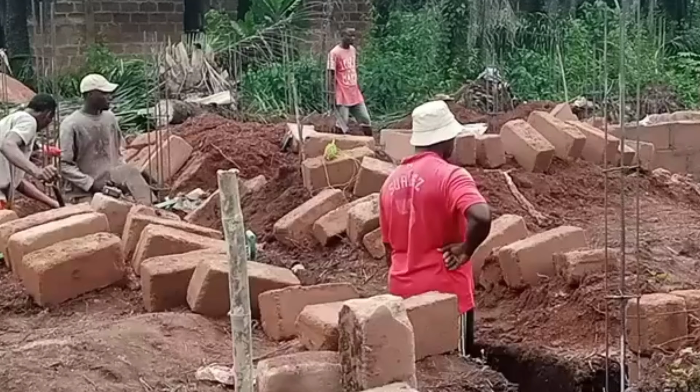Cost of building a 3-bedroom bungalow here in Nigeria. In this video, I'm going to give you the estimated quantity of materials needed and the estimated cost of materials using the current price, that is, the current price of building materials here in Nigeria in October 2024, excluding cost of labor. Yes, we are not including cost of labor in this video.

Now, I want you to note that it's going to be very difficult for you to derive an exact estimate for any building. So estimates can be high or low depending on the following factors. One, the location of the land, the location of the building. If you're building in Lagos, the cost of building a 3-bedroom bungalow in Lagos is different from the cost of building a 3-bedroom bungalow in Abuja. That is number one, the location of your building.

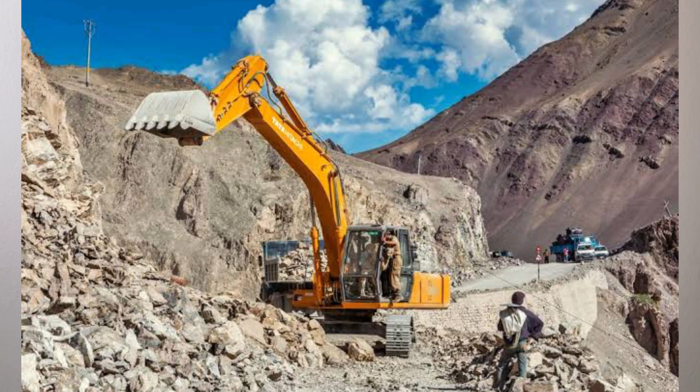The second one is the topography of the land. Are you building on a mountain area or valley or around bodies of water or on a plain land? If you're building around a mountain area, like the land is very mountainous in nature, it's going to cost you more to excavate this land. So even if someone is building the same 3-bedroom bungalow on a plain ground, it's going to cost you more because yours is a mountain area. It's going to cost you more to excavate the land.

Now, if you're building on a valley, it's going to cost you more for reinforcement. The filling of the land, from the foundation to the DPC level, and the reinforcement is going to cost you more, right? So that is it, the topography of the land.

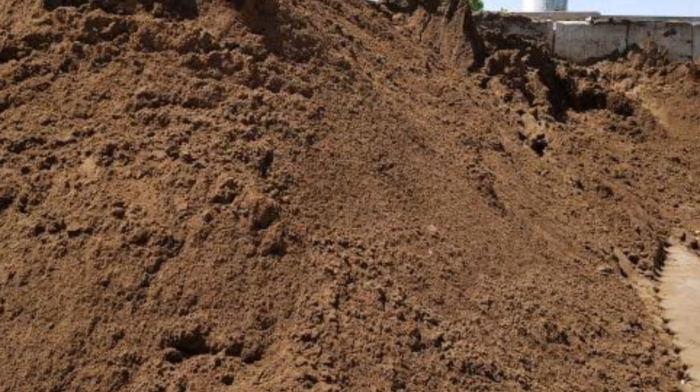Then another thing is the type of soil you're building on. Is it on a clay soil, loamy soil, sandy soil? We all know that loamy soil is the best type of soil for building. So the type of soil. Another thing is the design of your building. If Mr. A is building a 3-bedroom bungalow and you are building another 3-bedroom bungalow, if your design is not the same, the cost of building that 3-bedroom bungalow is not going to be the same.

Another thing is the construction method. The construction method this engineer used might be different from the construction method this other engineer used. So it's not going to cost the same. The different construction methods are going to require different amounts of money.

You understand? Another thing is the cost of building materials as at the time you're building. Even if someone built a 3-bedroom bungalow in 2023 with 10 million naira, it's not going to cost you the same 10 million naira to build that same type of 3-bedroom bungalow in 2024, and it's not going to cost you the same in 2025. So the cost of building materials as at the time you're building is another factor.

Another factor is the cost of labor. The cost of labor differs. Different engineers with different payments, the cost of labor differs. So these are the factors that affect the estimate or bill quotation any engineer will give you.

So the best way to get a very close estimate for your building is from your building plan. Once you get your building plan from your architect, you take it to your engineer. Your engineer should be able to derive a very close bill of quantities or quotation, the way we say it here in Nigeria, from your building plan.

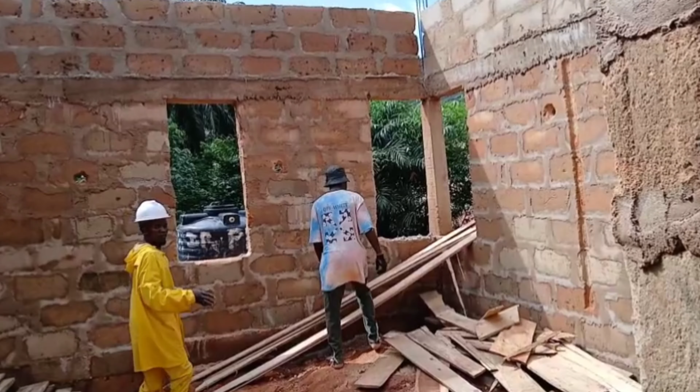For this particular 3-bedroom bungalow we are going to build, it has 3 bedrooms, all en-suites. It has a walkway. This bedroom has a walkway. There is an entrance to the whole apartment. That is the entrance, the outside. Then it has the kitchen, the visitors toilet. It has a balcony, the kitchen balcony. It has a sitting room. So these are the features the 3-bedroom bungalow has.

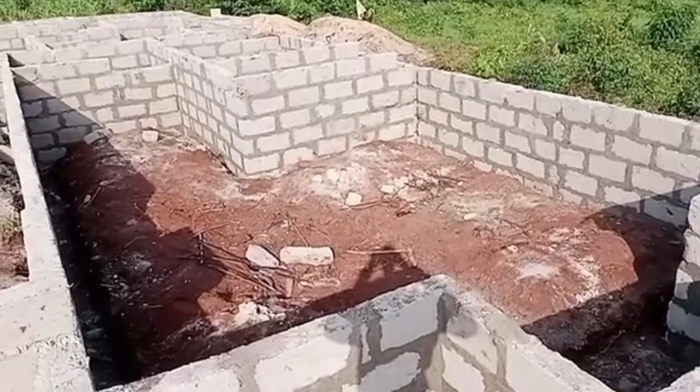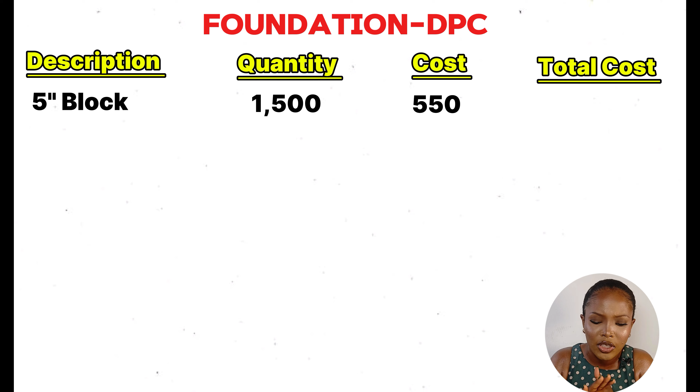For this particular 3-bedroom bungalow, from foundation to DPC level, we need 5 inches block, and we need 1,500 pieces of 5 inches block, and each 5 inches block costs 550 naira. So 550 naira times 1,500. Multiply 1,500 by 550 naira. We have 825,000 naira.

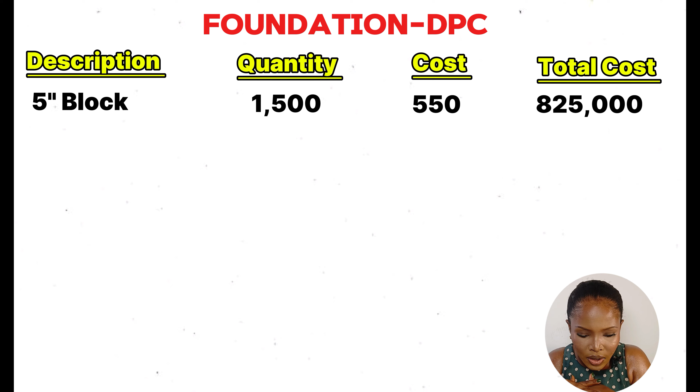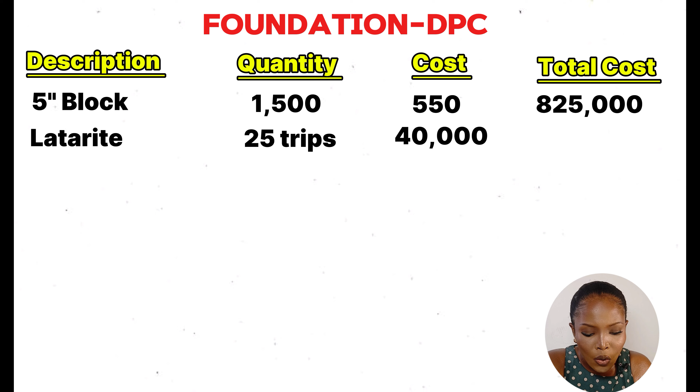Then the next one is the filling sand, that is the laterite. The filling sand, we need 25 trips, and each trip costs 40,000 naira. Currently, here in Delta State, in October 2024, the current price of filling sand, that is laterite, is 40,000 naira for a trip. That is one tipper, a trip. And now we need 25 trips, 25 tippers of laterite, and multiply that. 25 times 40 is giving us 1 million naira.

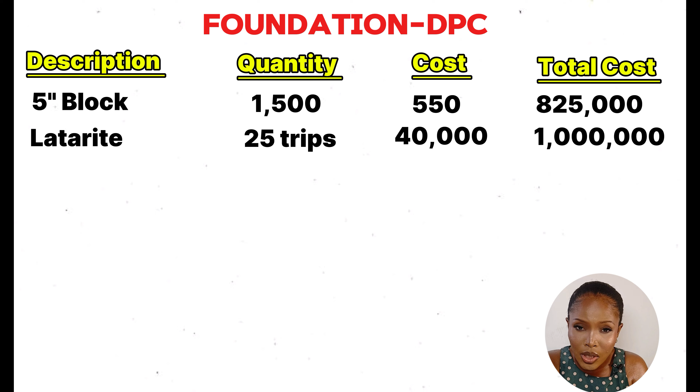Now, cement, we need 50 bags of cement. A bag of cement now in Delta State in October 2024 is 10,300 naira. It's always fluctuating. So 10,300 naira times 50 is giving us 515,000 naira.

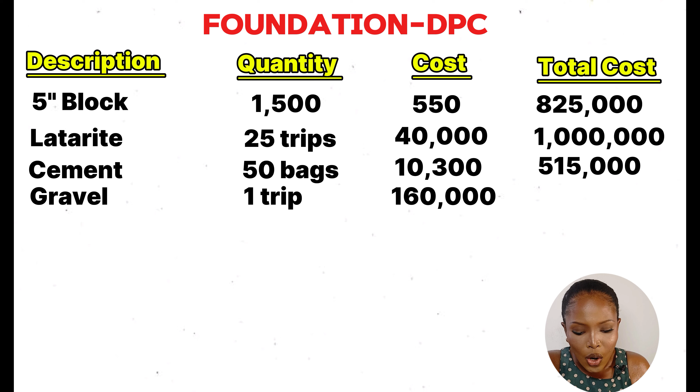Another thing we need is gravel. This is from foundation to DPC. We need one trip of gravel, and each trip of gravel is 160,000 naira now in Delta State, Nigeria. So now multiply 160 by 1 is giving us 160,000 naira.

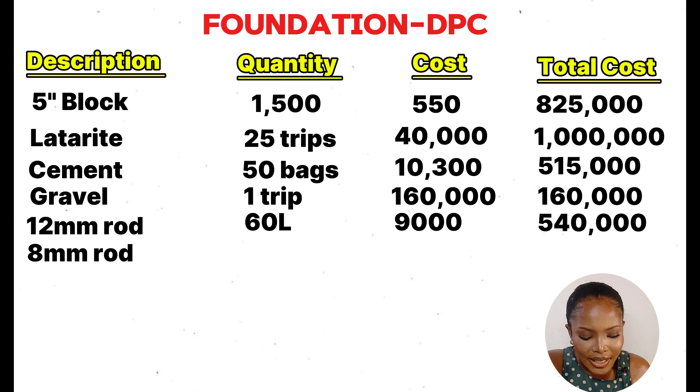Now we need 12 rod, and we need 60 lengths of 12 rod, and each length costs 9,000 naira. So 9,000 times 60 is giving us 540,000 naira. And then another thing is 8 rod. We need 20 lengths of 8 rod. Each length costs 4,000 naira. 4,000 times 20 is giving us 80,000 naira.

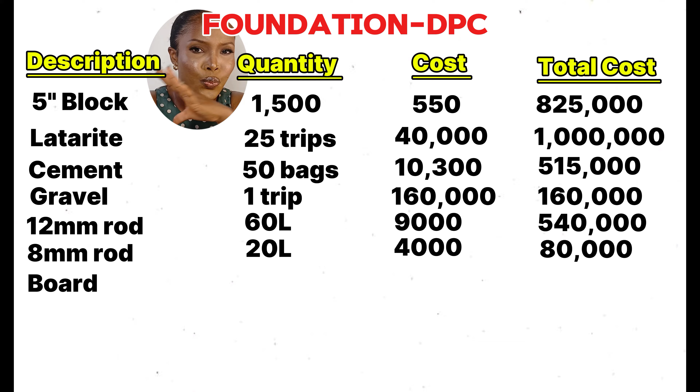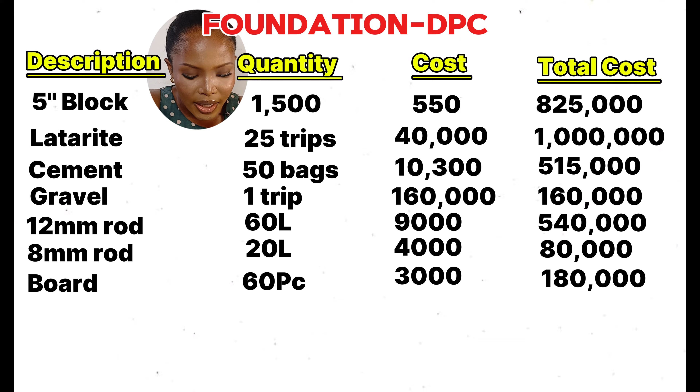Another thing we need is board. We need 60 pieces of board. Each piece of board costs 3,000 naira. So 3,000 naira times 60 is giving us 180,000 naira. We need binding wire for the whole reinforcement, and we need one roll of binding wire. One roll of binding wire costs 30,000 naira. So 30 multiplied by 1 is giving us 30.

Another thing we need is 3 inches nail. We need one bag of 3 inches nail, and each bag of 3 inches nail costs 33,000 naira, currently, in October 2024. So 33,000 times 1 is giving us 33,000. Another thing again is 4 inches nail.

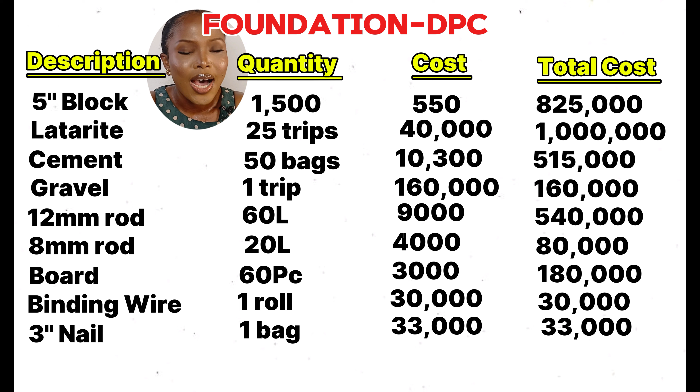We need another 4 inches nail, one bag of 4 inches nail. That one also costs 33,000 naira. 33 multiplied by 1 is giving us 33,000 naira.

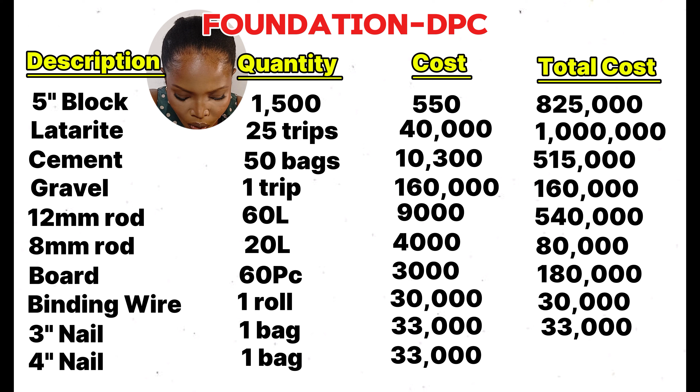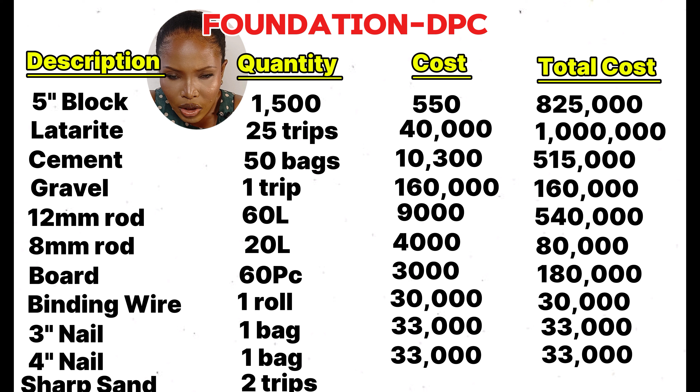We need sharp sand, to mix with the cement. The sharp sand, we need 2 trips. 2 trips of sharp sand, and each trip costs 60,000 naira. A trip of sharp sand now in October 2024 costs 60,000 naira. So 60 multiplied by 2 is giving us 120,000 naira.

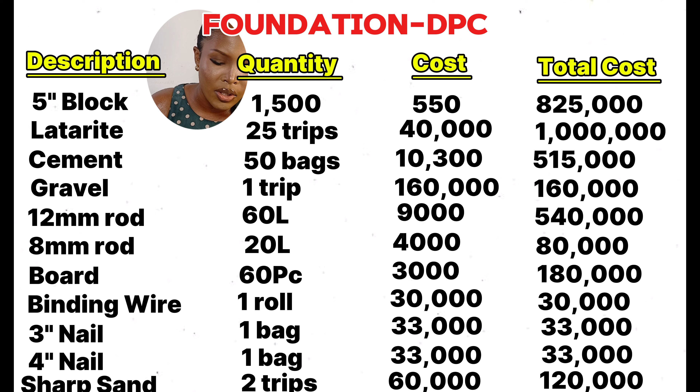120,000 naira. So from foundation to DPC, once you add everything together, is giving us 3,516,000 naira. 3,516,000 naira from foundation to DPC to build a 3-bedroom bungalow here in Nigeria in 2024.

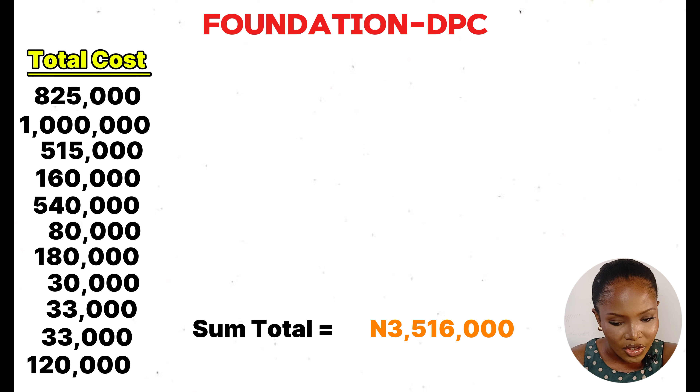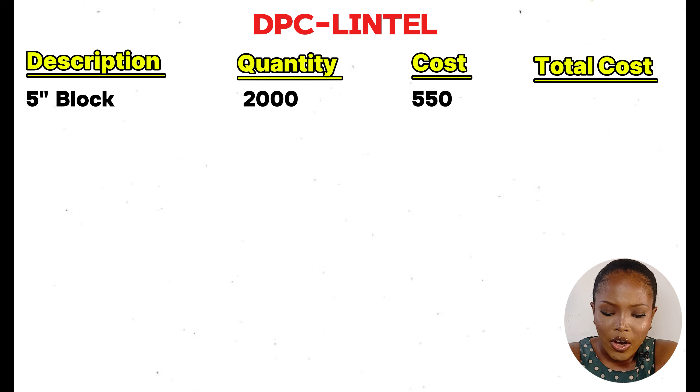Now, from DPC to Lintel level, we need 5 inches block. We need 2,000 pieces of 5 inches block, and each, of course, is 550 naira. 550 times 2,000 is giving us 1,100,000 naira. That is 1.1 million naira.

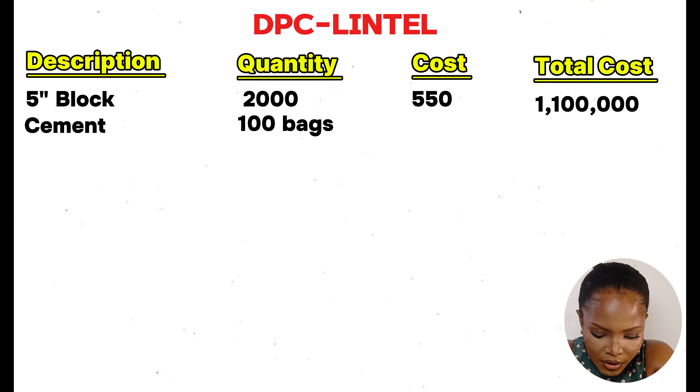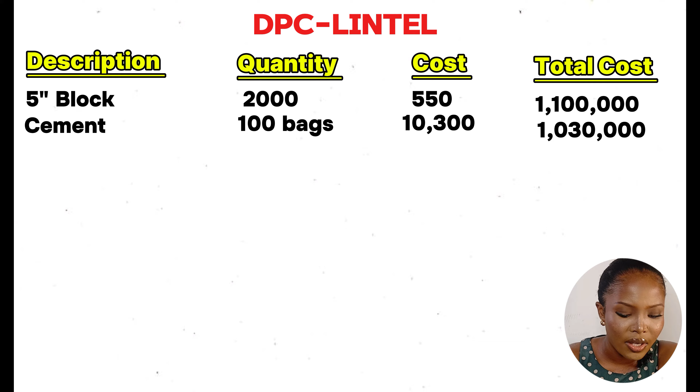Then another thing is cement. We need 100 bags of cement, and each bag now costs 10,300 naira. 10,300 naira multiplied by 100 is giving us 1,030,000 naira. Another thing we need is gravel. One trip of gravel, and a trip of gravel is 160,000 naira. 160 multiplied by 1 is giving us 160,000 naira.

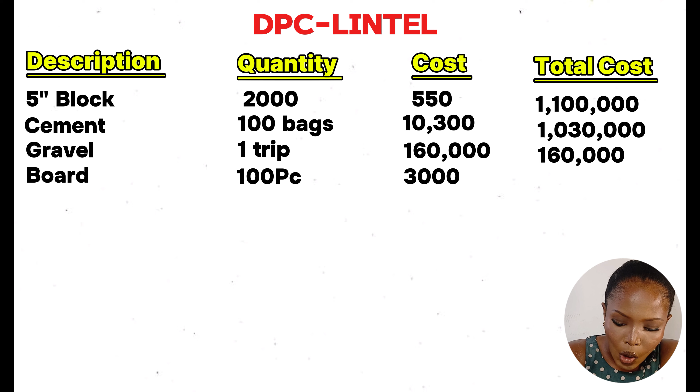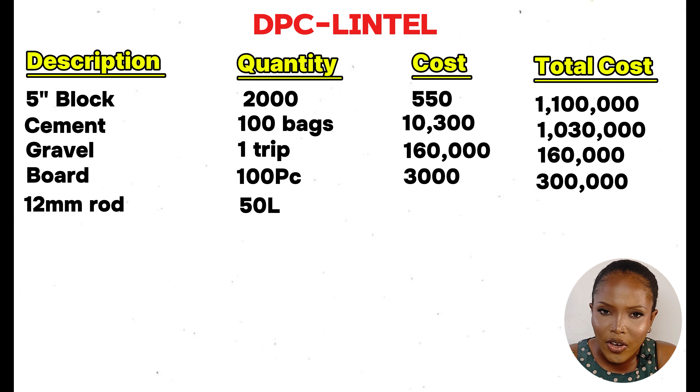We need board again. 100 pieces of board, and each piece of board costs 3,000 naira. 3,000 times 100 is giving us 300,000 naira. We need 12 rod. 50 lengths of 12 rod, and each 12 rod costs 9,000 naira. So 9,000 times 50 is giving us 450,000 naira.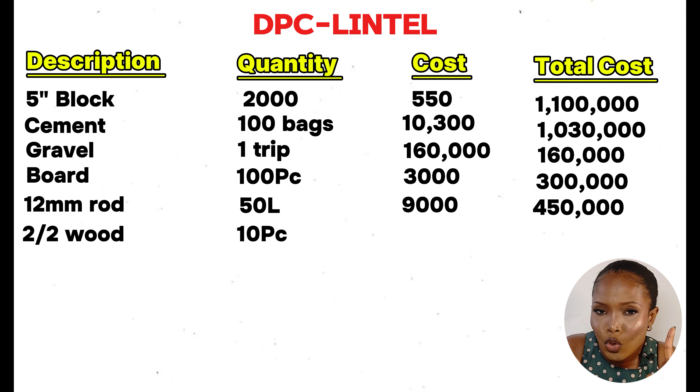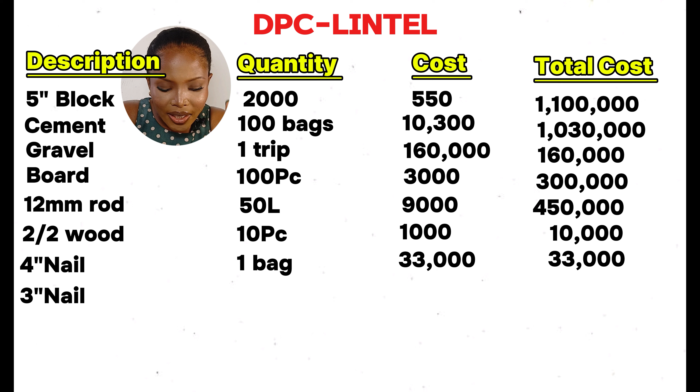We need 2 by 2 wood. 10 pieces of 2 by 2 wood, and each piece of 2 by 2, the hardwood, costs 1,000 naira. 1,000 times 10 is giving us 10,000 naira. Then we need 4 inches nail. One bag of 4 inches nail, 33,000 naira. We need another 3 inches nail. One bag of 3 inches nail costs 33,000 naira. So those ones are 33,000.

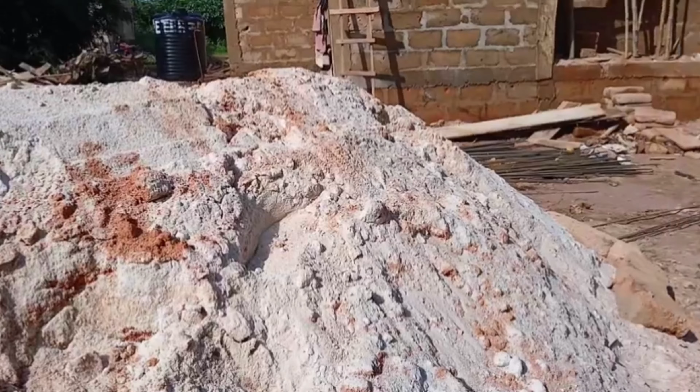We need sharp sand again to mix. 10 trips of sharp sand, and each trip of sharp sand costs 60,000 naira. So 60 times 10 is giving us 600,000 naira. We need 8mm rod, 20 lengths of 8mm rod, and each length costs 4,000 naira. So 4,000 times 20 is giving us 80,000 naira.

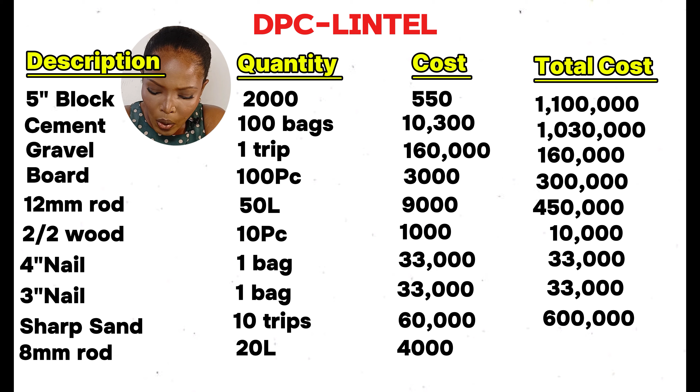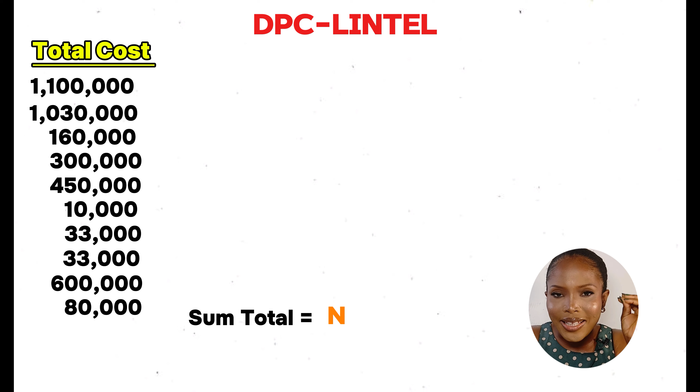So that is from DPC to Lintel. So a total of what we need from DPC to Lintel for this 3-bedroom bungalow is 3,796,000 naira. 3,796,000 naira from DPC to Lintel for a 3-bedroom bungalow here in Nigeria in 2024.

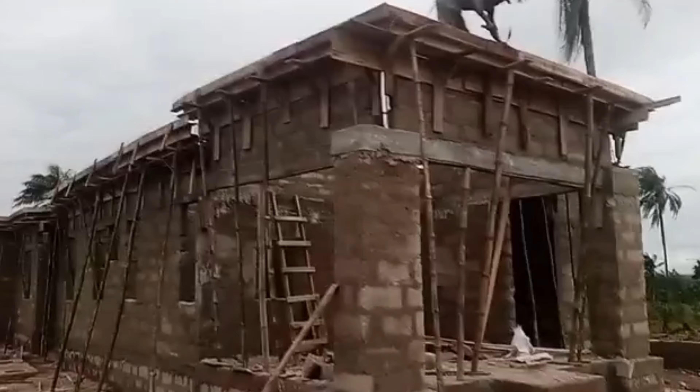Okay, now let's move over to the parapet, from Lintel to parapet, right? Now that is concrete fascia. So we need board. We need 80 pieces of board, and each piece of board costs 3,000 naira. So 80 times 3,000 is giving us 240,000 naira.

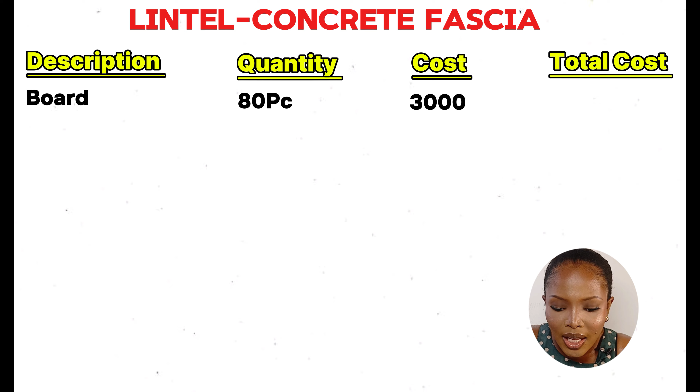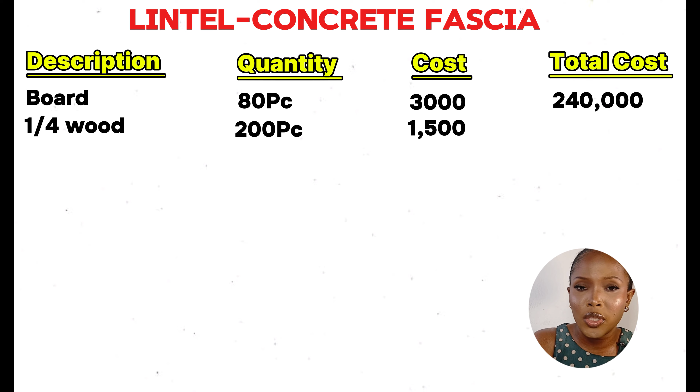We need 1 by 4 wood, we need 200 pieces of 1 by 4 wood, and each piece costs 1,500. So 1,500 times 200 is giving us 300,000 naira. We need another 1 by 5 wood, and we need 200 pieces of 1 by 5, and each piece costs 1,500. 1,500 multiplied by 200 is giving us another 300,000 naira.

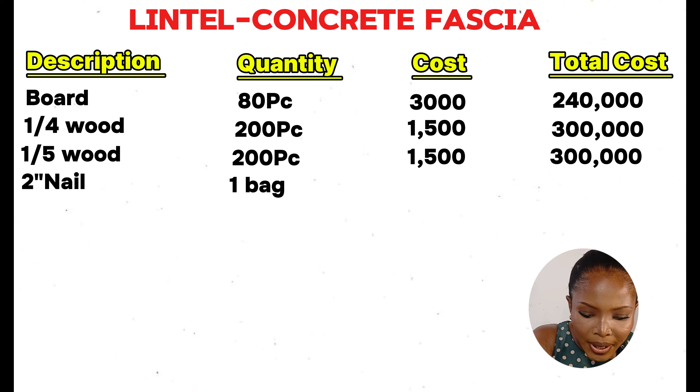We need 2 inches nail. One bag of 2 inches nail, 33,000 naira. We need 3 inches nail. One bag of 3 inches nail, 33,000 multiplied by 1, 33,000. 4 inches nail. One bag of 4 inches nail, 33,000 naira multiplied by 1 is giving us 33,000 naira.

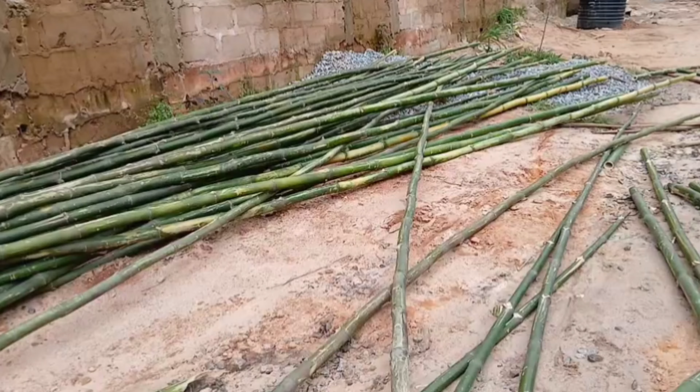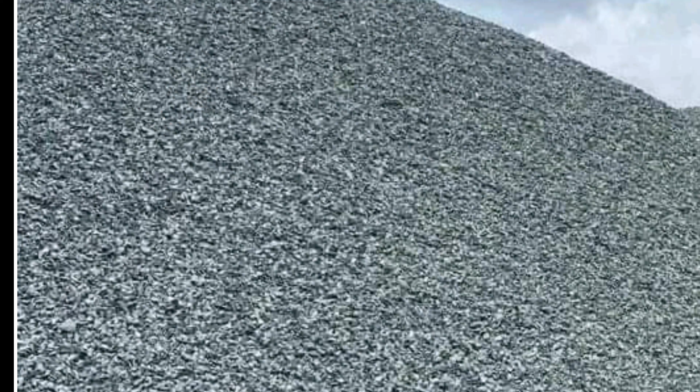We need bamboo, 60 pieces of bamboo, and each piece costs 800 naira. 800 multiplied by 60 is giving us 48,000 naira. And then we need gravel, the chippings, the small gravel, because that's what we're going to mix to pour on, to get the shape for that parapet.

So the chippings, we need one tipper, and each tipper costs 160,000 naira, just like the main gravel. 160,000 naira multiplied by 1 is giving us 160,000. We need 12 rod, and we need 50 lengths of 12 rod, and each length costs 9,000 naira. So 9,000 times 50 is giving us 450,000 naira.

We need 8 rod, 30 lengths of 8 rod, and each length costs 4,000 naira. 4,000 naira multiplied by 30 is giving us 120,000 naira. We need cement, okay? We need 30 bags of cement. Each bag of cement costs 10,300 naira. So 10,300 naira multiplied by 30 is giving us 309,000 naira.

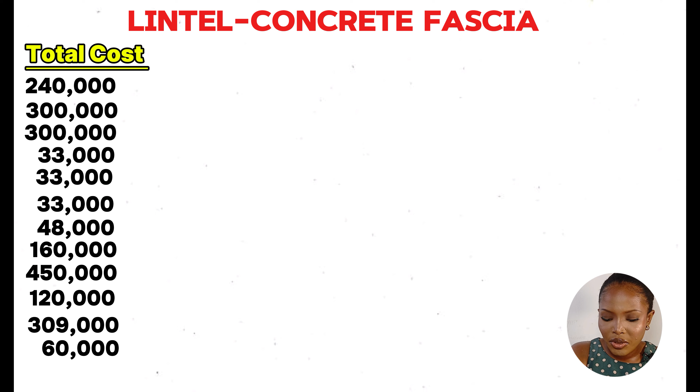Then we need sharp sand, 1 trip of sharp sand, and each trip of sharp sand costs 60,000 naira. So 60 multiplied by 1 is giving us 60,000 naira. So from lintel to 3-step parapet, we need a total of 2,086,000 naira. That is from lintel to parapet.

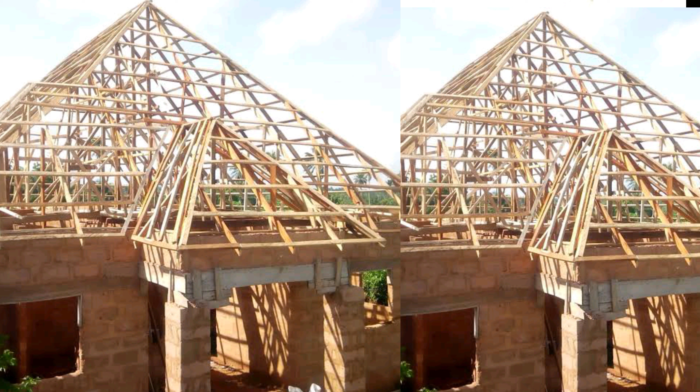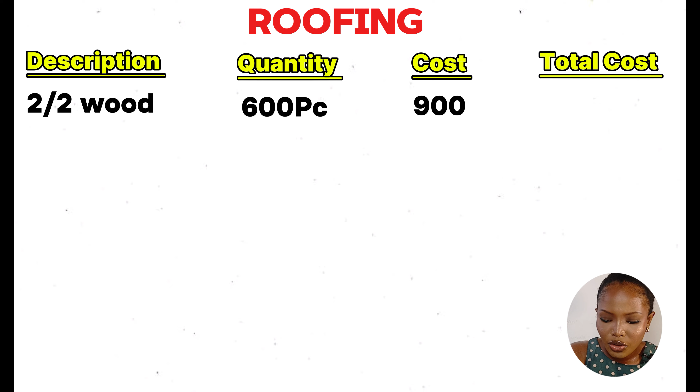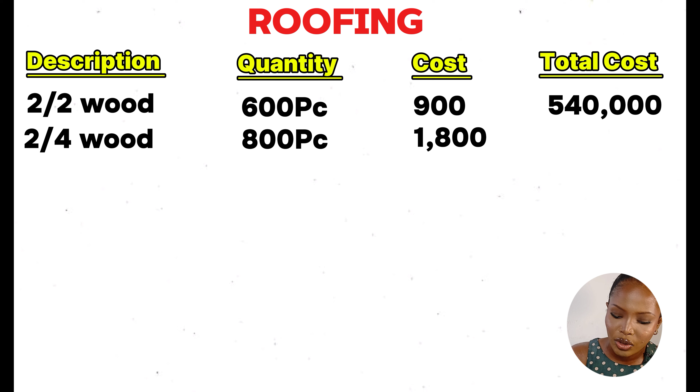Now the roofing. We need 2 by 2, 600 pieces of 2 by 2, and each piece costs 900 naira. 900 multiplied by 600 is giving us 540,000 naira. We need 2 by 4, 800 pieces of 2 by 4, and each piece of 2 by 4 costs 1,800 naira. So 1,800 multiplied by 800 is giving us 1,440,000 naira.

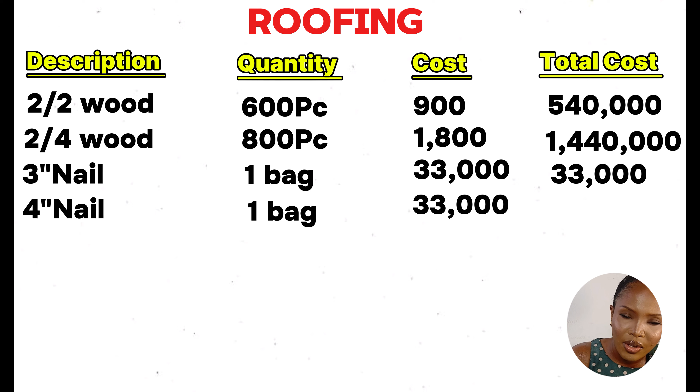And then we need 3 inches nail, one bag of 3 inches nail, 33,000 naira. 4 inches nail, one bag of 4 inches nail, 33,000 naira. So for the roofing, we need a total of 2,046,000 naira.

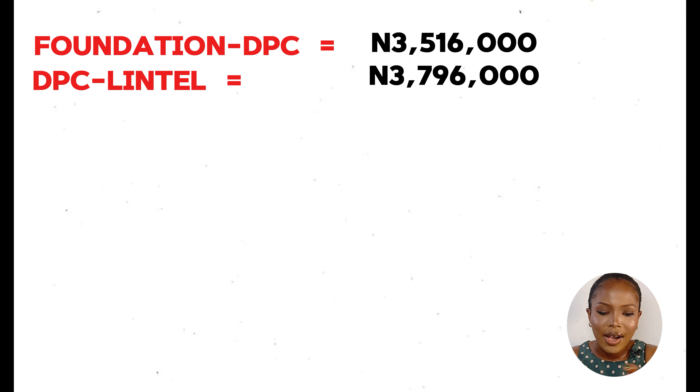Now, adding all of this together: from foundation to DPC, we need 3,516,000 naira. Then from DPC to lintel, we need 3,796,000 naira. Then from lintel to parapet, we need 2,086,000 naira. Then for the roofing, we need 2,046,000 naira.

So the total cost of building a 3-bedroom bungalow, just the skeleton, we're not talking about the plastering, the plumbing work, just the skeleton work, is 11,444,000 naira. The total cost of building a 3-bedroom bungalow here in Nigeria in October 2024 is 11,444,000 naira just for the skeleton. We're not talking about all the interiors.

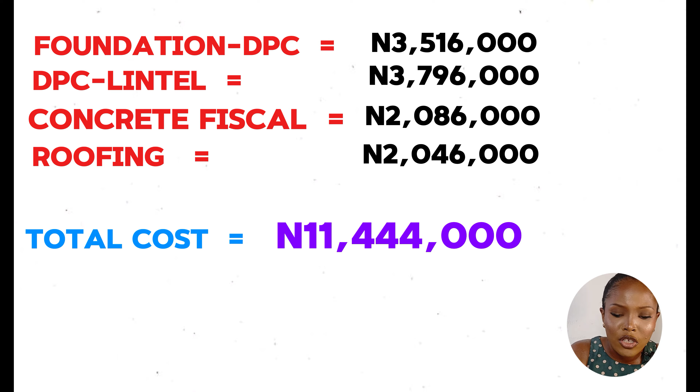So I hope this video helps you out. This video is just to give you an idea on how much it will cost you to build a 3-bedroom bungalow here in Nigeria in 2024. We need a total of 11,444,000 naira, and this is just for the skeleton work. We're not talking about the plastering, plumbing, wiring. We're just talking about the skeleton work, to cost you a total of 11,444,000 naira here in Nigeria in October 2024.